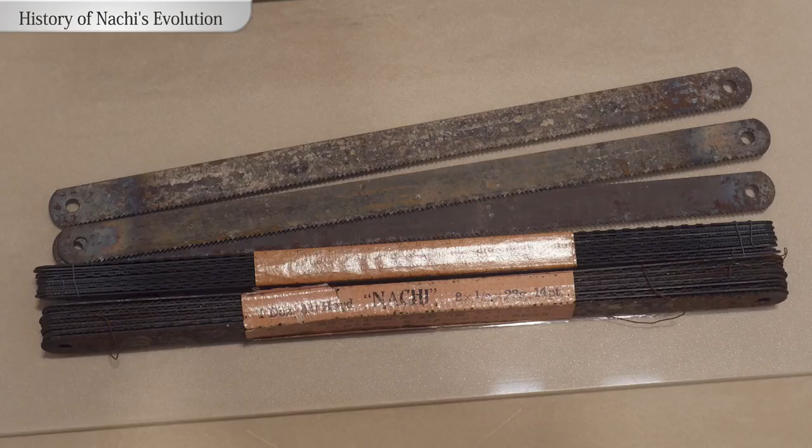First, I asked for advice from my seniors and decided to research the company's origins. Established in 1928 by founder Koki Imura, aiming to domestically produce machine tools which at the time relied on imports, he created the hacksaw as the first product. Starting with tools, NACHI began producing tools and bearing materials in-house with the goal of creating even greater products.

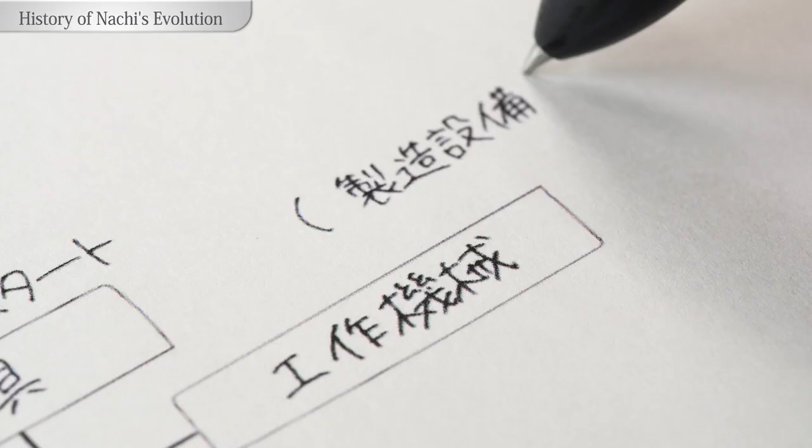Furthermore, NACHI started the machine tool business by producing manufacturing equipment in-house. Subsequently, it began manufacturing robots by utilizing its machine tools and hydraulic control technology. I learned the current structure, which has evolved into 8 divisions, was the very symbol of interconnectedness through divisions, and was what gave NACHI its strength as a comprehensive machinery manufacturer capable of integrated production starting from materials.

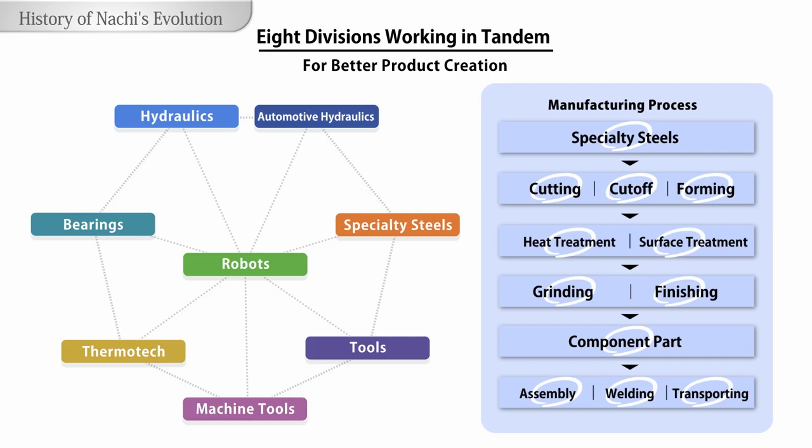NACHI is developing its business globally. From the 1960s, NACHI began expanding into a wide range of locations in North and South America, as well as Europe. Then into China and ASEAN countries in the 2000s. We have expanded our business by building production and sales locations around the world.

By continuing to manufacture and sell high-quality products globally, NACHI will support its customers. I, for one, chose NACHI, attracted by such global vision and possibilities.

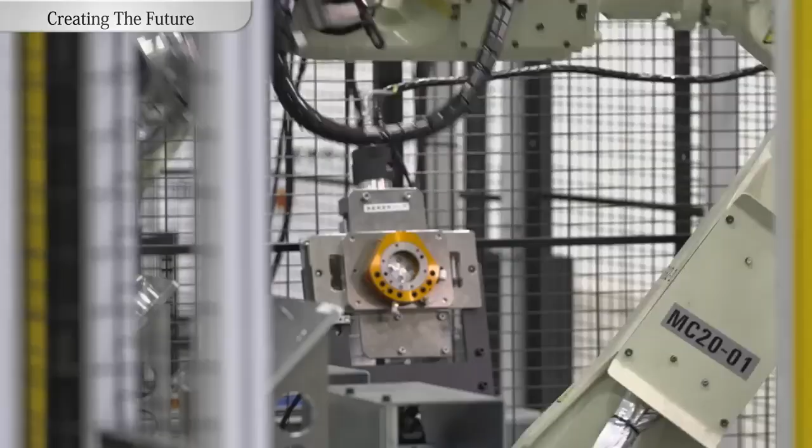NACHI, a company that continues to grow. I looked into the company's efforts to address changes in industrial structure, which are essential for future development. Automation by robots will resolve labor shortages, and collaborative robots that work alongside humans will enable production streamlining.

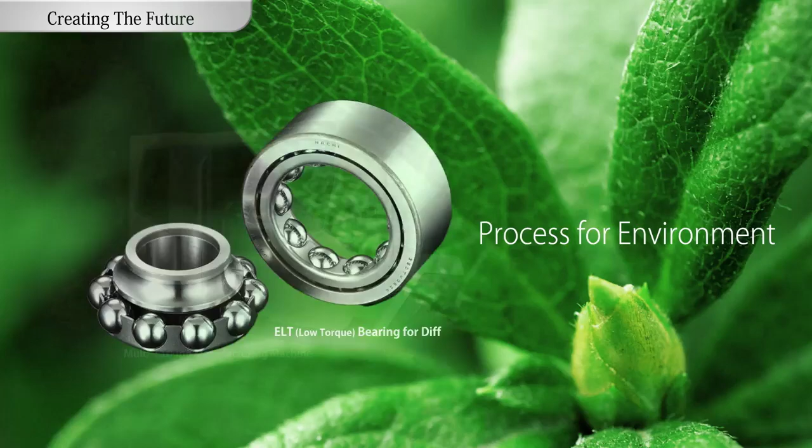Developing many products that support the electrification of automobiles and implementing unique technology as part of its environmental initiatives, NACHI offers many eco-friendly products. Our hydraulic equipment for industrial machinery consumes less power, contributing to energy saving throughout the facility. By installing solar power generation systems in the offices to reduce CO2, NACHI is working proactively to achieve carbon neutrality.

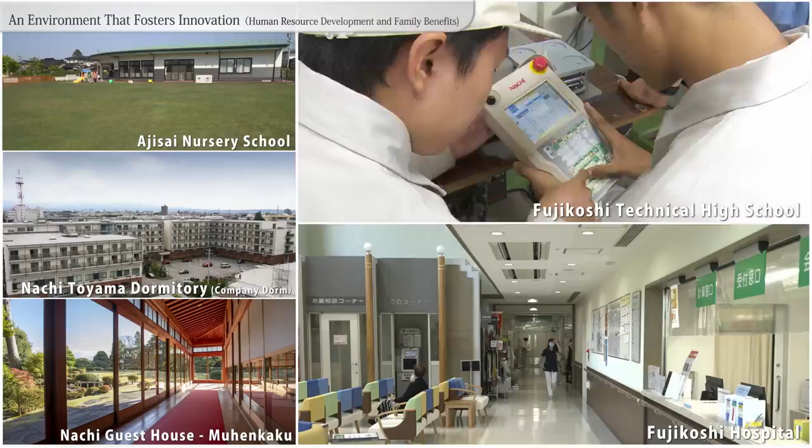NACHI has focused not only on manufacturing, but also the development of the people who will lead the future, and the importance of the everyday lives and health of its employees. The founder's belief, people are the backbone of manufacturing, continues to be passed down to this day.

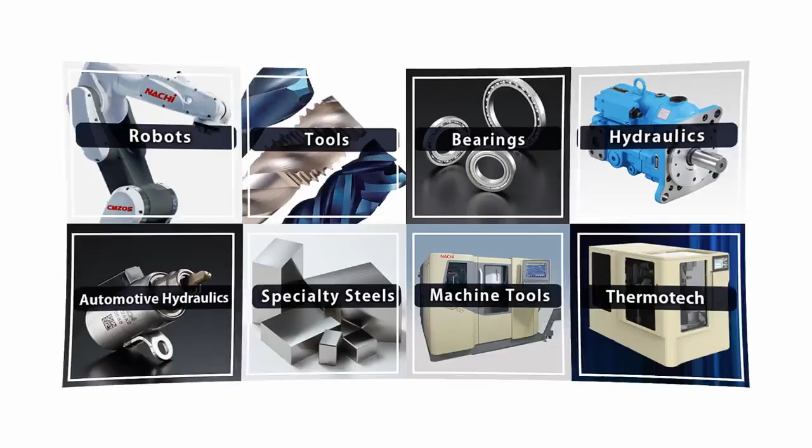At NACHI, the 8 unique business divisions constantly create new products through interconnectedness. I strongly believe that NACHI can continue to grow as a manufacturing company that fulfills dreams.

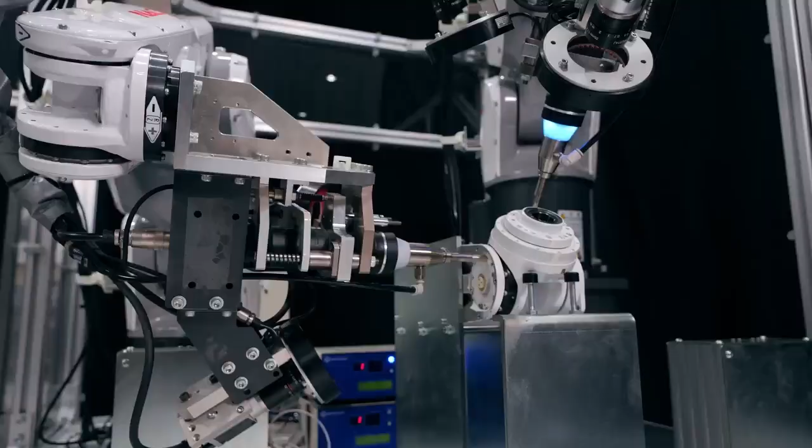I would like people to know more about NACHI and its efforts to grow into a company that contributes to society further, contributing to the development of global manufacturing.

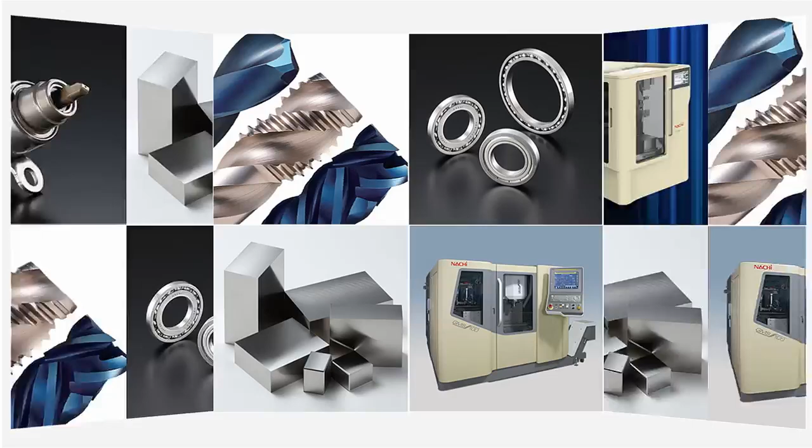NACHI's strength is our 8 business divisions with their own originality working in tandem to create new products.

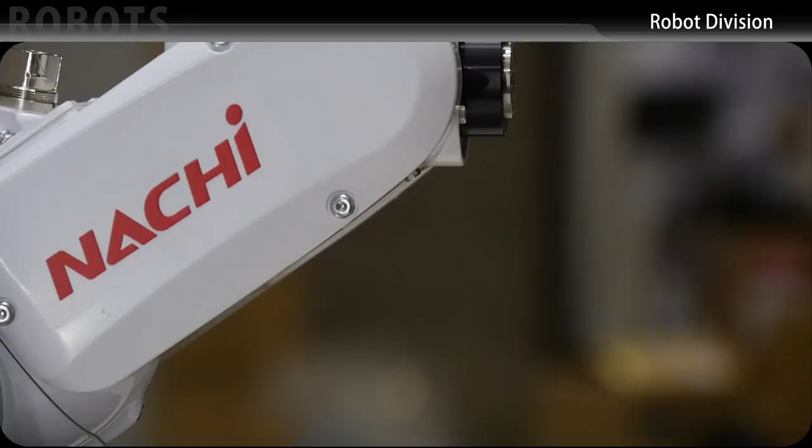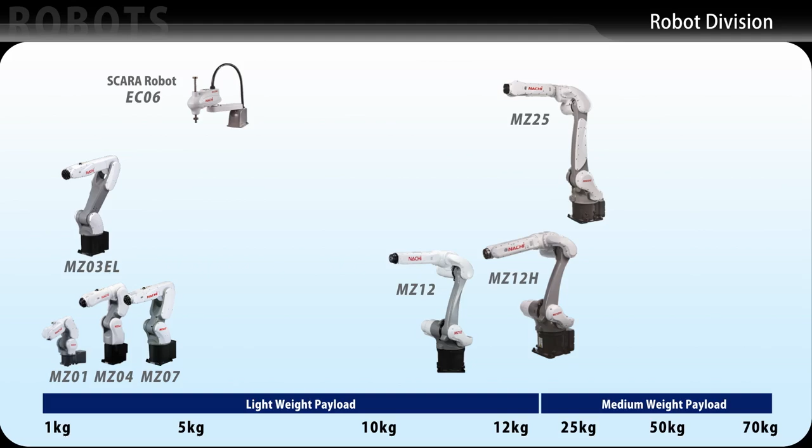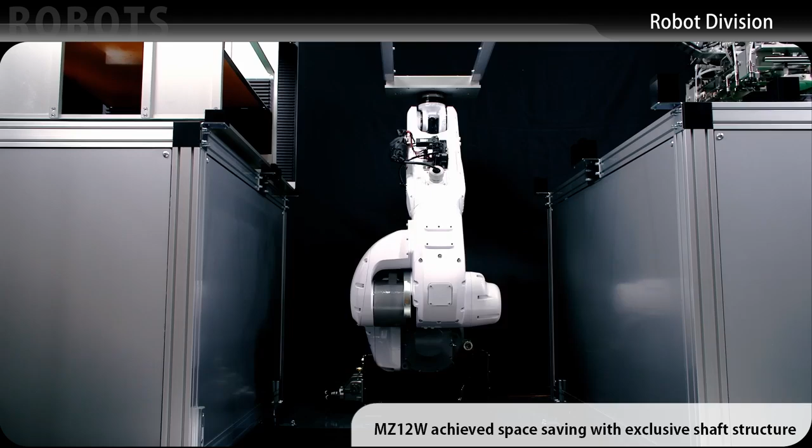Since we started the robot business in 1968, we have been pursuing what customers demand in automation. With a wide transportable weight lineup, from 1 to 1,000 kilograms, we are developing a product series based on high-speed, high-precision compact MZ, promoting collaboration between humans and robots, responding to customer needs including systems and applications. With NACHI robots, we are opening up the world of manufacturing.

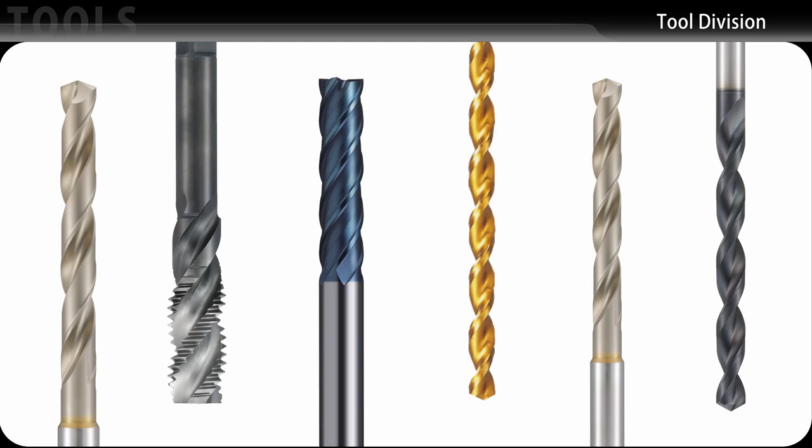Where it all began for NACHI is tools. Our passion for making better tools led us to produce materials and coatings in-house. That was the cue for NACHI to become the comprehensive machinery manufacturer we are today.

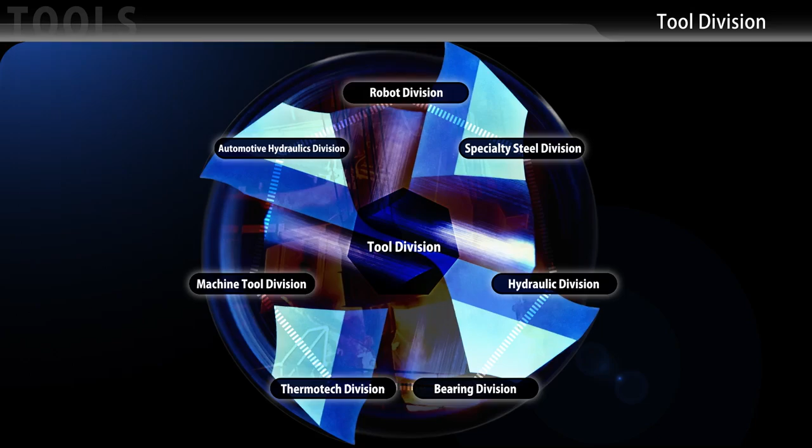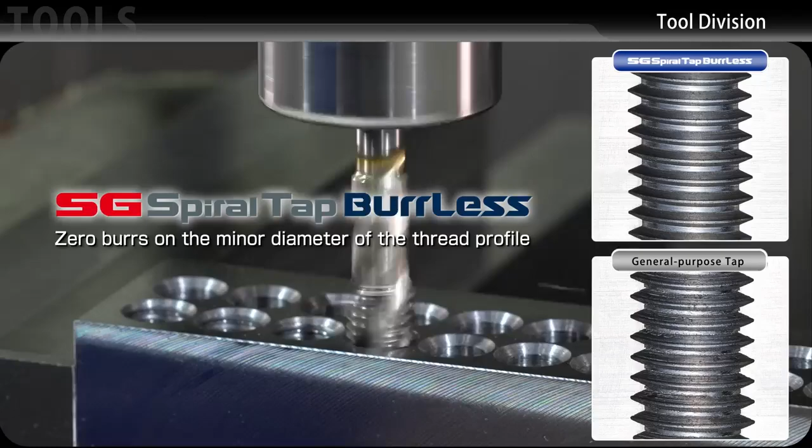With tools as our starting point, the development and interconnectedness of our business divisions are the driving forces behind creating entirely new tools that cannot be imitated by competitors. When tools change, manufacturing changes.

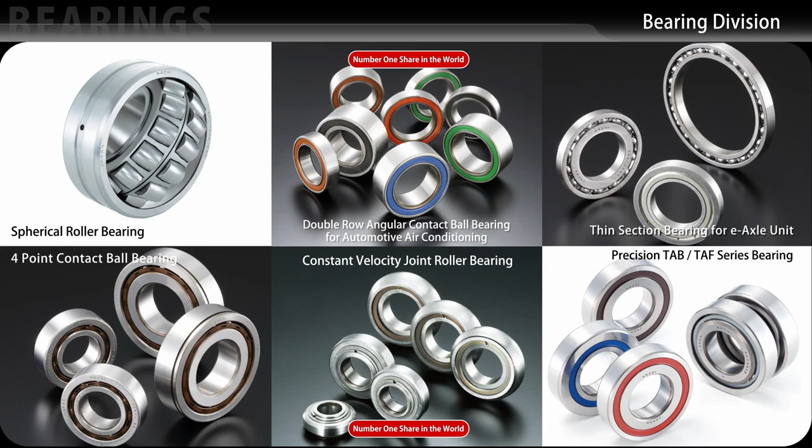Bearing technology is the symbol of NACHI's development. Our bearings, using unique materials to achieve long life and high performance by advanced grinding and heat treatment technology, were compactly designed and are used in a variety of fields, including automobiles and industrial machineries around the world, contributing to improved reliability. Rotate, support. NACHI bearings in your daily life.

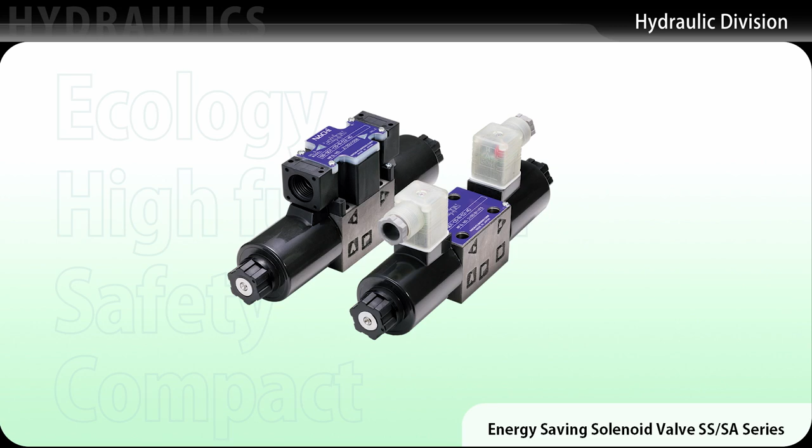The history of NACHI's hydraulic products is a history of trust with our customers. Truly needed products, that's what NACHI has been creating together with our customers. In the construction machinery segment, we boast a very high market share in mini excavators.

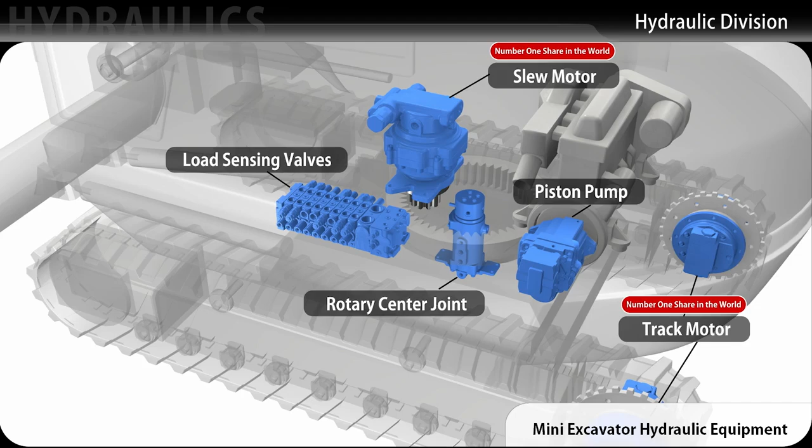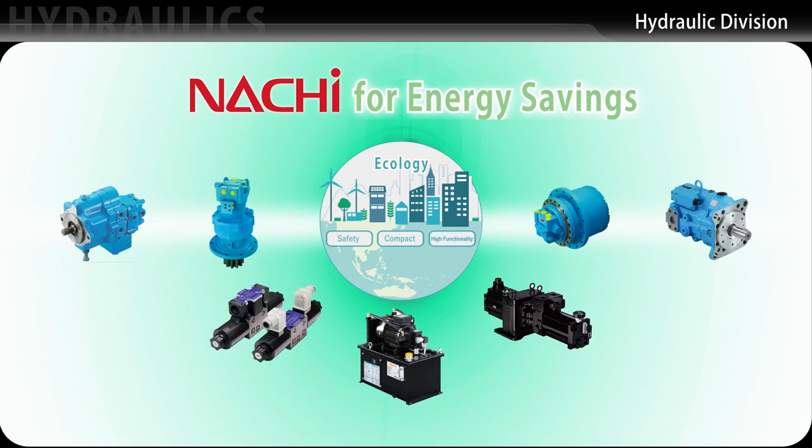And in the general industrial machinery segment, in addition to reliability, we have a reputation among customers who choose NACHI hydraulics for energy savings. For many years to come, we will continue to further refine safe, compact, and highly functional hydraulic equipment that will create the future.

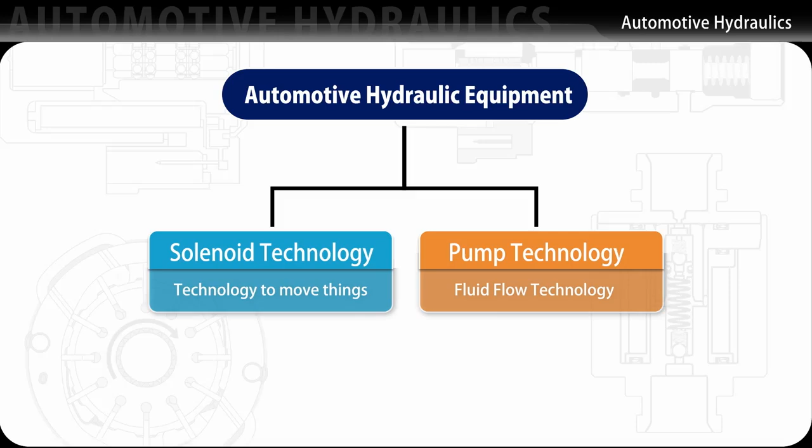Our automotive hydraulics division, in response to the rapidly progressing shift to EVs, is working on the electrification of products. Starting from manufacturing hydraulic devices for automobiles, we have developed with solenoid and pump technologies at its core. By leveraging electric actuator and vane pump technologies, we will expand our product lineup from parts for EVs to industrial machineries. Automotive hydraulics will lead the future of electrification.

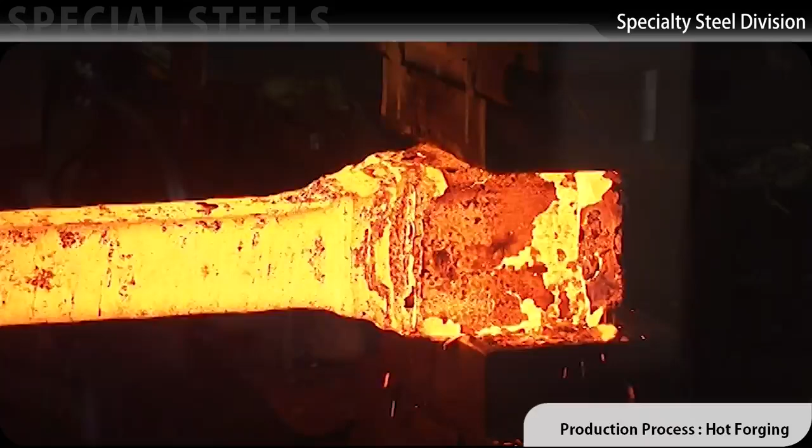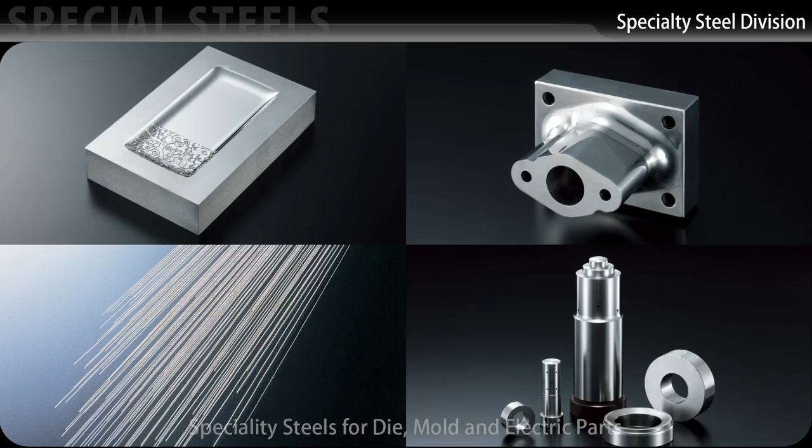The division supporting NACHI's manufacturing is the Specialty Steel Division. At NACHI, having our own melting furnace enables a wide variety of material manufacturing, including high-speed steel. According to the diverse needs of our customers, we have been making full use of component designs and melting technologies to pursue the optimal materials. Our strength as a comprehensive machinery manufacturer lies in our ability to perform integrated production starting from materials.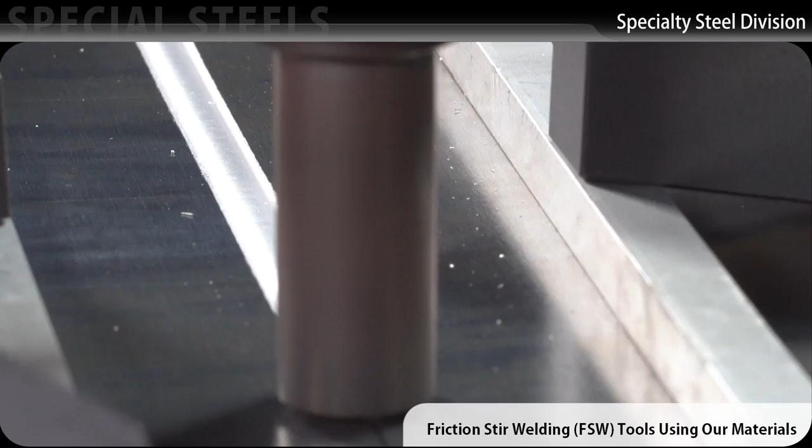NACHI will change the conventional theories of materials. NACHI's machine tools started with broach development and have since released into the world products that are indispensable for ever-evolving manufacturing.

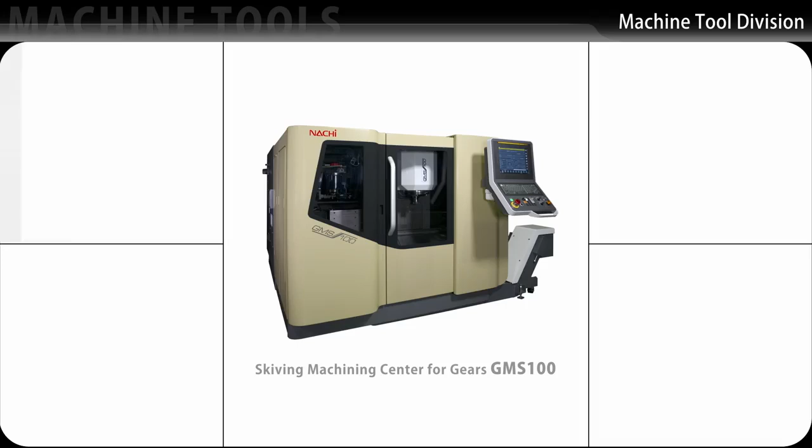Maximizing our features as a comprehensive machinery manufacturer with a variety of businesses such as tools and robots, NACHI has received high valuation and trust. Abundant ideas and reliable quality. With NACHI machine tools, your manufacturing experience will expand.

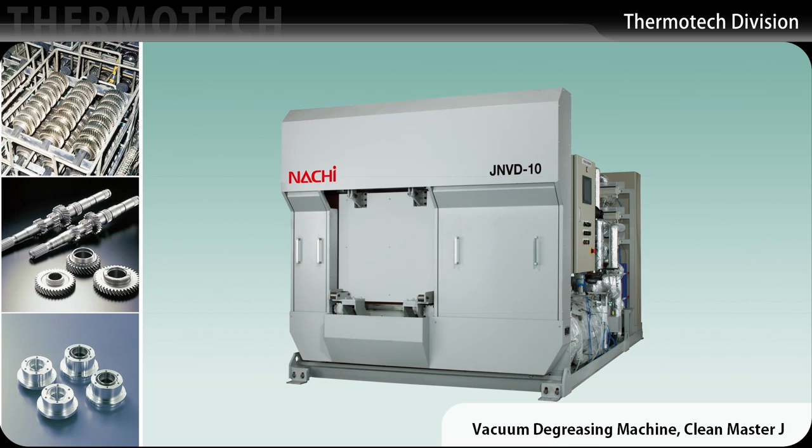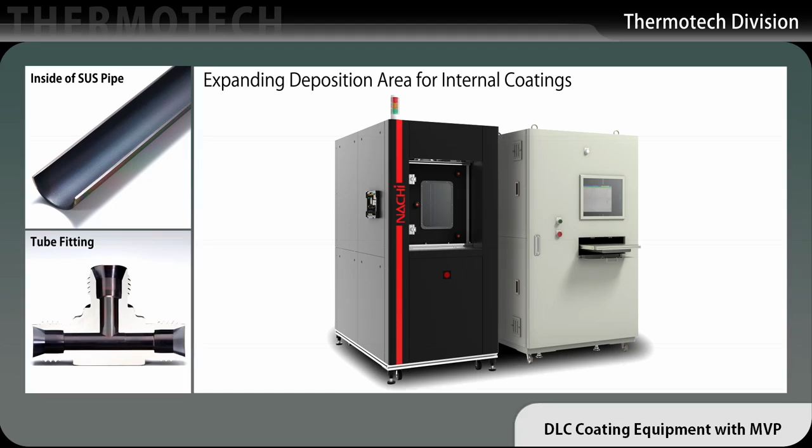The high level of NACHI's Thermotech technology is proven by the quality of NACHI's products. Our vacuum degreasing machine, Clean Master, has earned the trust of many customers. The technology, which has created vacuum carburizing furnaces, vacuum heat treatment furnaces, and coating equipment, is based on state-of-the-art surface treatment technology. Towards the realization of carbon neutrality, now is the time for NACHI's surface treatment technology.

NACHI is quick to catch the needs of the times, exploring ways to evolve manufacturing from various angles, and continues to develop even at this very moment.

NACHI will continue to be a comprehensive machinery manufacturer that contributes to the development of the manufacturing world as we keep pushing forward to become a manufacturing company that fulfills people's dreams.